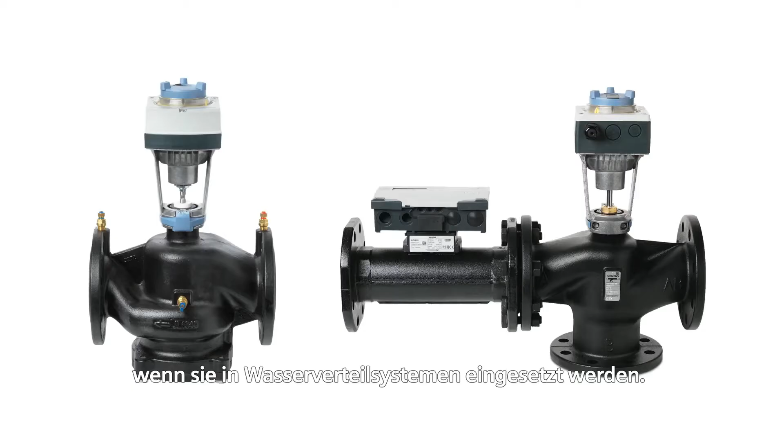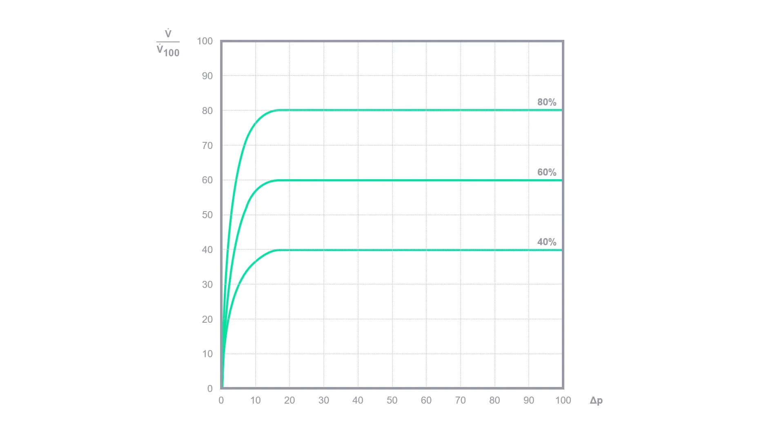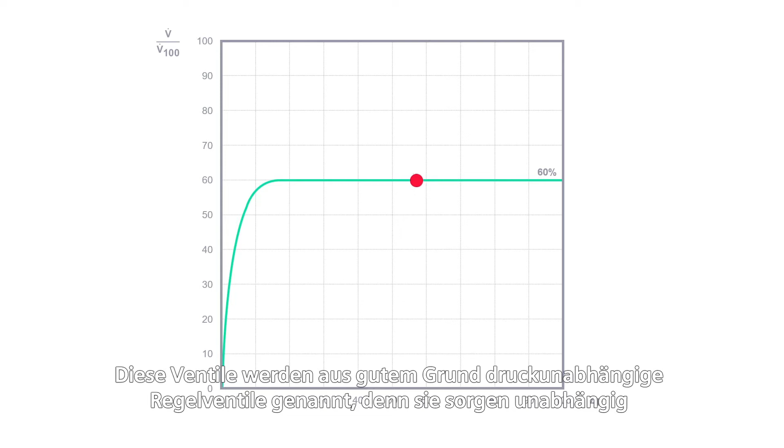Today, I'd like to provide more detail on how dynamic balancing valves give the maximum thermal comfort when used in water distribution systems. To do that, we should consider that the main purpose of mechanical or electronic dynamic balancing valves is to maintain consistent flow at the desired level as long as needed. This chart shows how the Siemens PACV maintains constant flow in the coil it is controlling, and it explains the reason why these valves are called pressure-independent control valves. Because they maintain constant flow irrespective of pressure fluctuations. However, this is just part of the story.

In fact, as we have seen in the previous episode, if you want to achieve the highest energy savings possible, you need to reduce the energy you put in the environment as soon as this is not needed anymore. But what are the important factors we should make sure a PACV can actually deliver in order to assure they can most efficiently modulate the flow and reach the best energy performance? The first thing is that the actuator and the valve must be designed to operate as one.

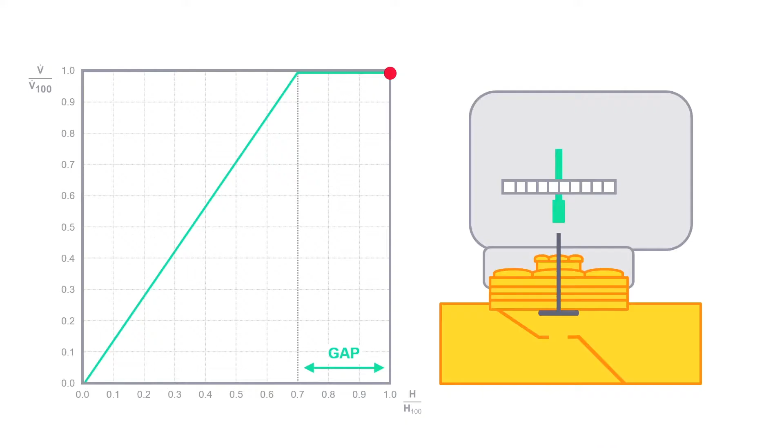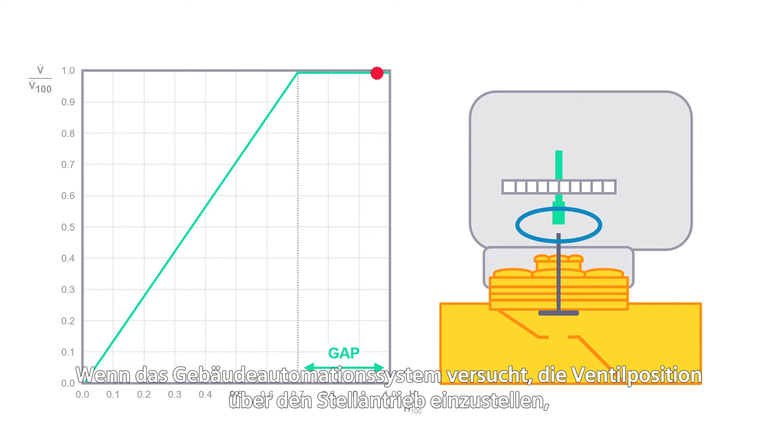Many times I have seen valves and actuators coming from different sources and installed together, giving strange performance, like this chart for example. And this happens when an actuator has a longer stroke than the valve and there is a gap between the two stems of valve and actuator. In fact, when the building automation and control system tries to adjust the valve position through the actuator, in the upper part of the chart, nothing happens. The flow remains unchanged, and you end up with an on-off-like system.

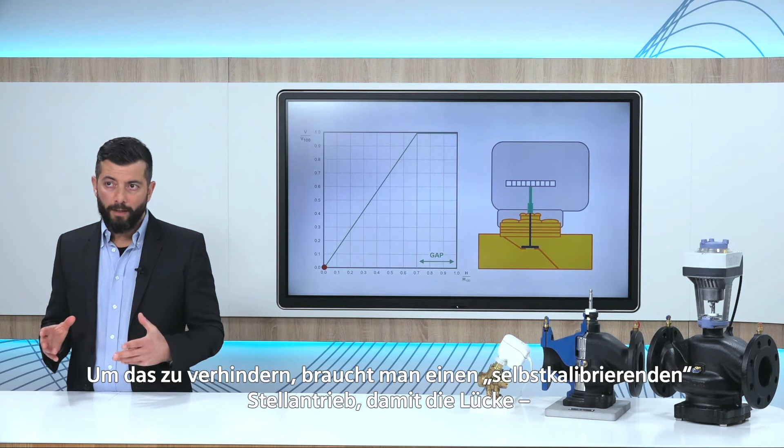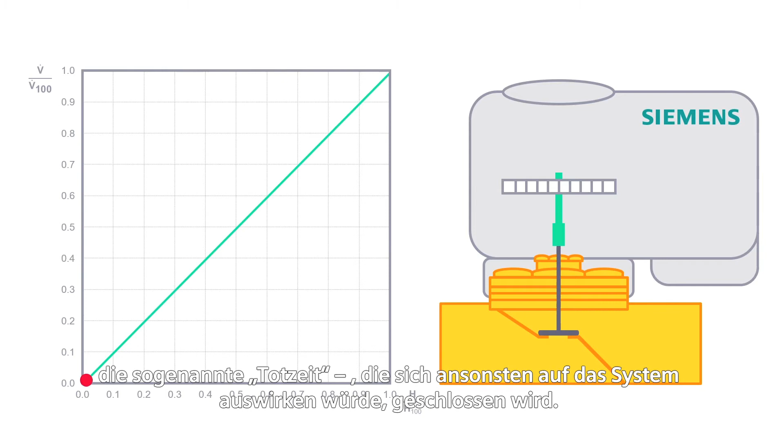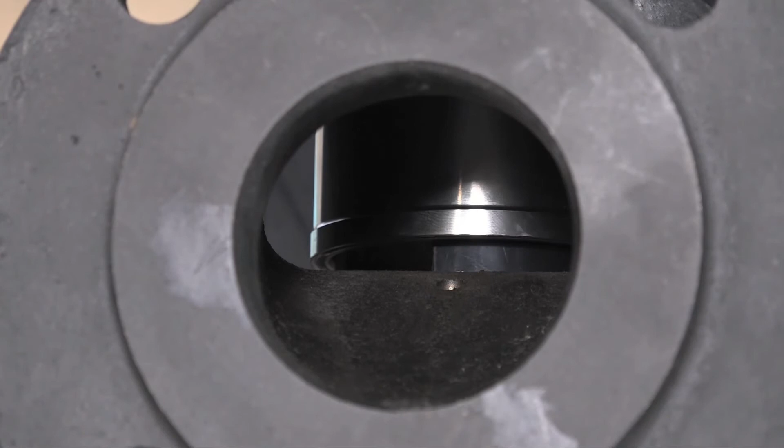To prevent this, you must make sure the actuator has the so-called self-calibrating feature to eliminate the gap or dead band that would otherwise affect the system. The second feature, very important in a mechanical PACV, is that the currently preset flow should not reduce the stroke of the valve. When you reduce the stroke of the valve, you sacrifice important millimeters, which could have been used for better modulating performance. At Siemens, we call this feature full stroke modulation.

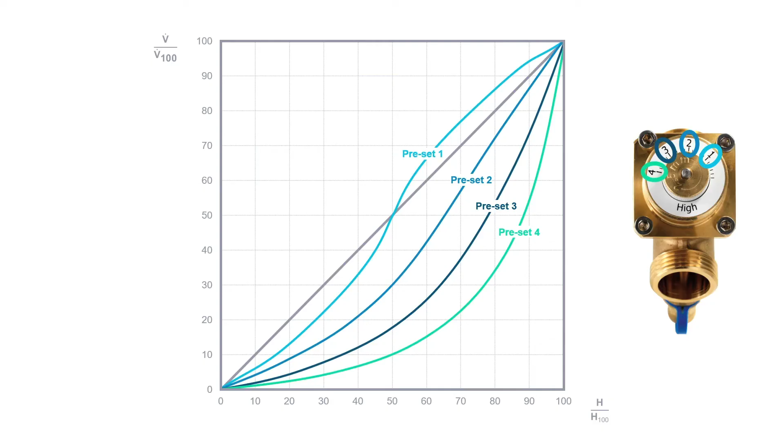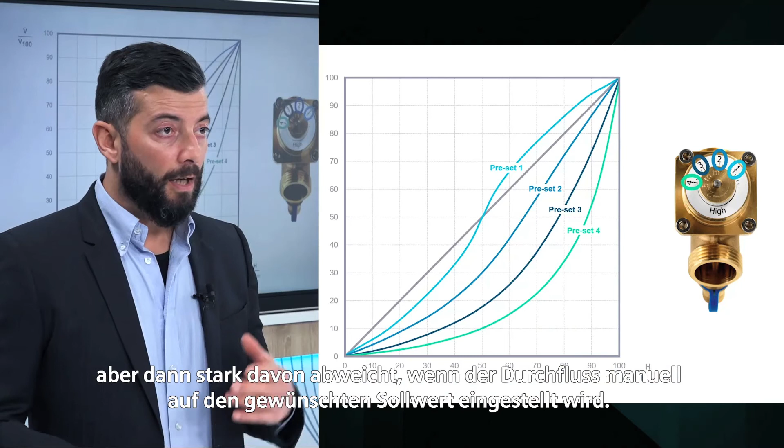And the last feature I'd like to talk about today is the fact that the shape of the characteristic control curve should not change when presetting your mechanical dynamic balancing valve. This is an example of a valve that has a good control curve at 100% open, but then heavily deviates from this when manually adjusting the flow down to the desired value. In the example shown on the screen, you can see how the shape of the control deviates when changing the flow presetting position. And this is something you really want to avoid.

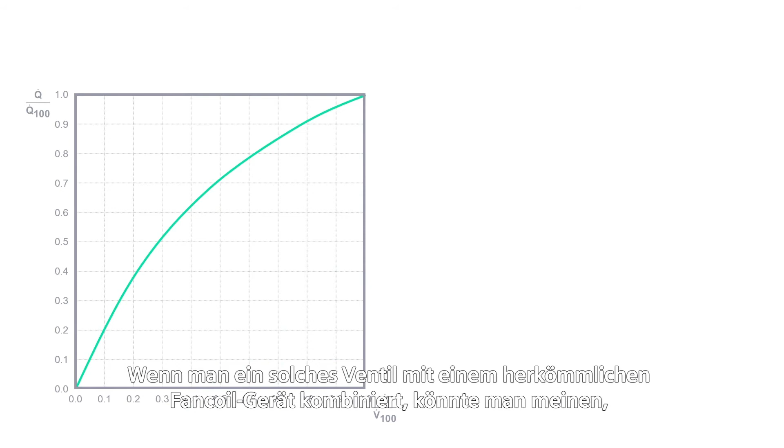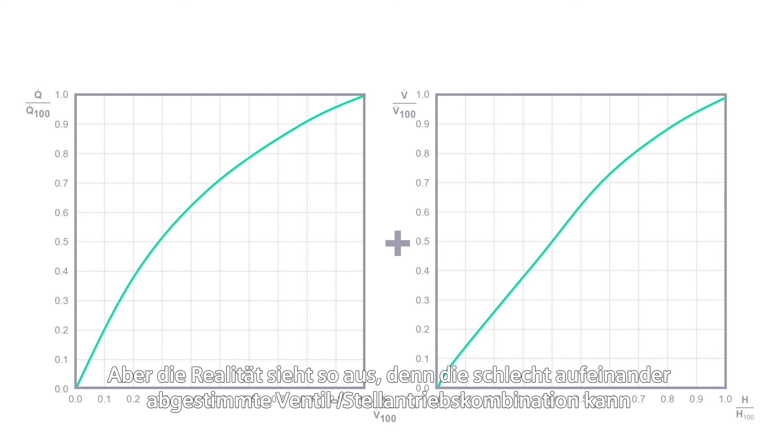In fact, if you combine such a valve with a standard fan coil unit, you might think you are getting a linear system as a result of this combination, which we have detailed in the previous episode. But you actually get this, where the imperfectly shaped valve and actuator bundle is not able to fully compensate for the nonlinearity of the coil.

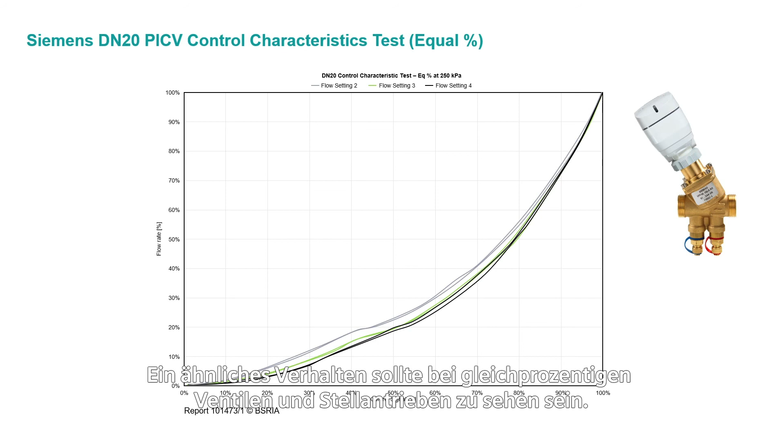So my suggestion, especially for big projects and big systems, is simple. Just ask for a proof of performance, which can be provided by issuing a test report from an independent testing institute. This is an example of what you should be getting. For linear control valves, see, all the curves are represented in the same chart, and they should have the exact same shape. Does not matter the presetting position. A similar behavior should be seen with equal percentage valves and actuators. At Siemens, we call this constant authority.

And the three features just described, self-calibrating, full stroke modulating, constant authority, really make the difference among all PICV available in the market. In the next episode, we will describe how dynamic balancing valves interact with one of the most important elements of a hydronic system, the circulating pump.